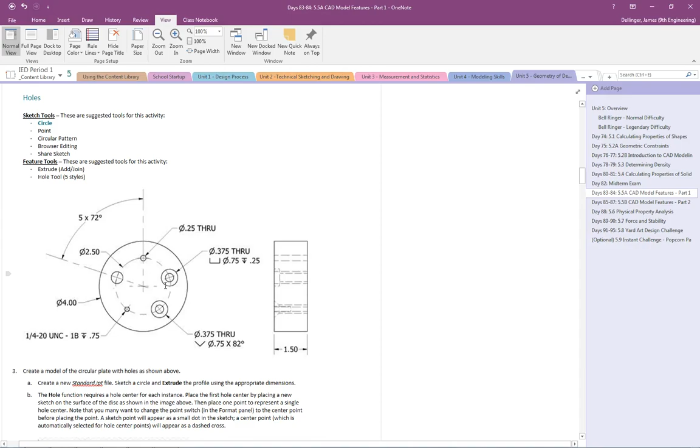Since this is the first time people are using pattern, the holes thing, while it's quite simple, can be a little tricky when it comes to the pattern. Also, you've not used the hole command very much, and so that can confuse you as well. The hole command is different from everything that we've really done up until now, because up until now we've made a sketch and then we've done something with the sketch, like extrude it.

Right now, holes is a little bit different. Some of you may have played with this. Holes is different because we make a sketch, but the hole command works on points. So you place a point and then the hole command works from that point. So what we need to do is first make a

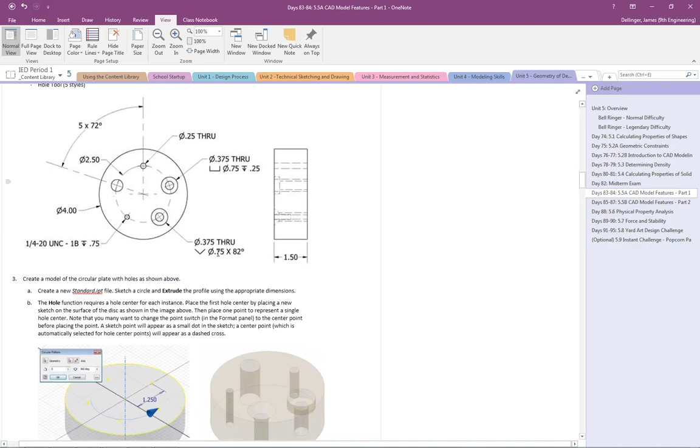slug, a round disc, and then we're going to poke some holes into it. It's going to be 4 inches in diameter and 1.5 inches thick. So we go over here to Inventor, and then we will start the sketch.

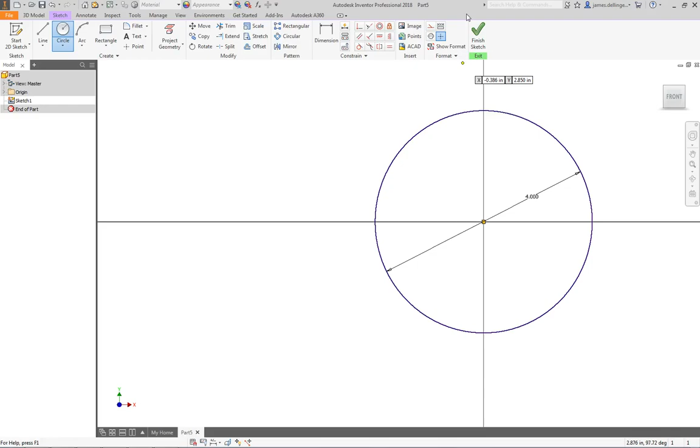Click there, and let's go ahead and make our circle. Drop it on the origin, say 4, enter. Finish the sketch. From there, go extrude. I want to extrude 1.5, and so now I've got my disc.

I can go in, I can go ahead and create sketch. And from there, I'm going to make another circle, because if we look here, we have this, all the 5 circles are equidistant, and they are at 2.5 inches in diameter to their center point. So 5 by 72 degrees, 2.5.

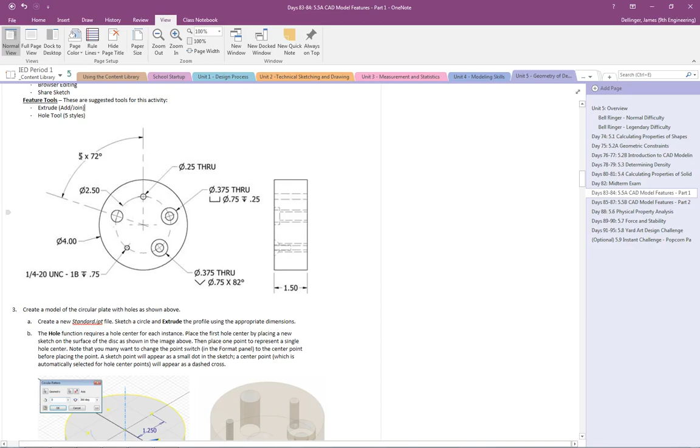Do not draw this and do the hole command, or try to do this without using the pattern. The whole point of this is the pattern. So we're going to make another circle. We'll drop that in, 2.5. Let's go ahead and click it, right click, construction.

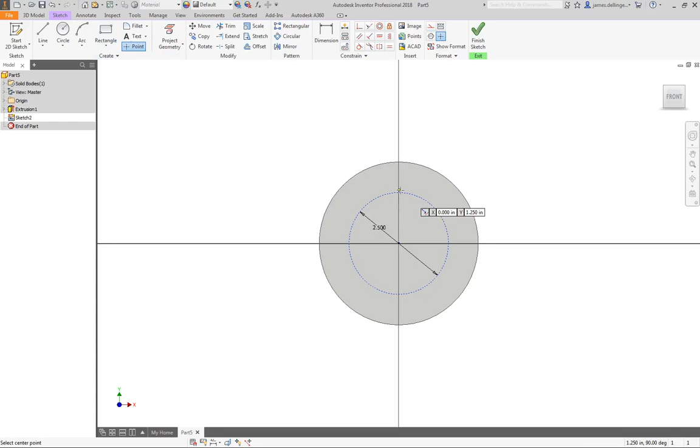We're going to go point, and we'll drop our point there. So we have a point. It's a little hard to see because it's yellow, but there's a point there.

Now all I have to do is the pattern. It's right here in the pattern section. Go circular pattern. I'm going to pick my geometry first. It says select geometry to pattern. Click my point. I'm going to click over here to the arrow on my axis, and it says define axis of revolution. That's my center point of my circle, or my origin.

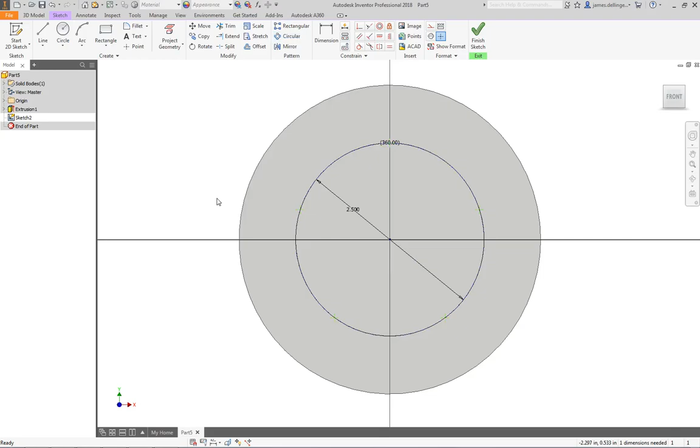And you'll notice I'll have 6 points here. 1, 2, 3, 4, 5, 6. I really want 5. So now I have 1, 2, 3, 4, 5. Hit OK, and now I have my 5 points. And I can finish my sketch.

Now all I have to do is go to my sketch, and if I select it and say hole, it's going to automatically try to punch 5 holes in there because I have 5 points, and it thinks that's exactly what I want. And those holes are 1/4 inch in diameter, and it goes all the way through, and you can see that they go all the way through.

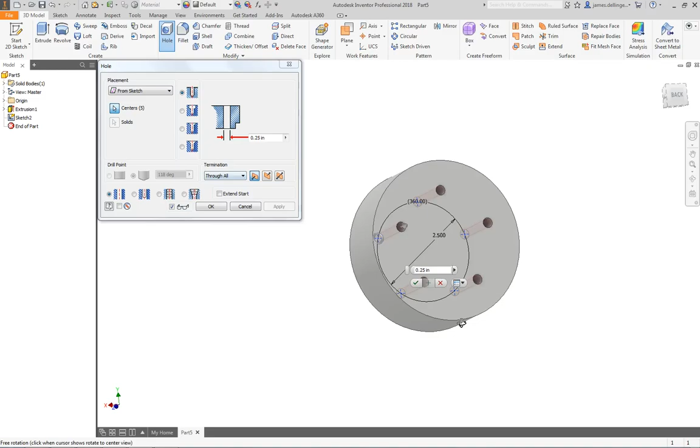I don't want but one hole to be that way, so I'm going to hold down the shift key and click the point. As I click those points, if you don't click the point, you can get yourself in trouble. Just exit out and then try it again. But you can do that. And you got the one left, say okay.

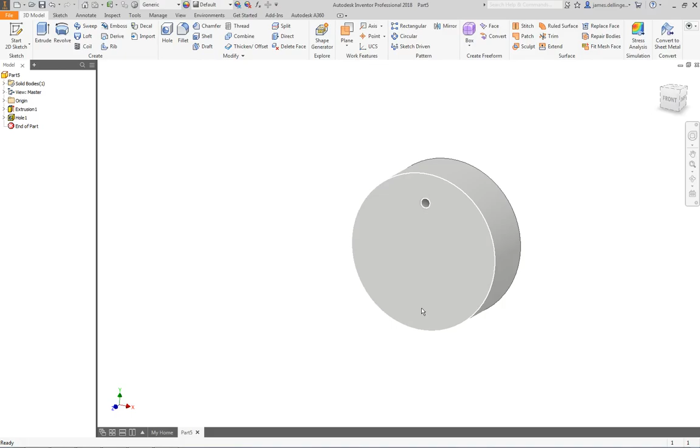And then notice, oh wait, I have 4 more points that I need and they're all gone. So what you need to do is come over here to hole, and we need to share the sketch. So open that up, click that little arrow, right click, and say share the sketch.

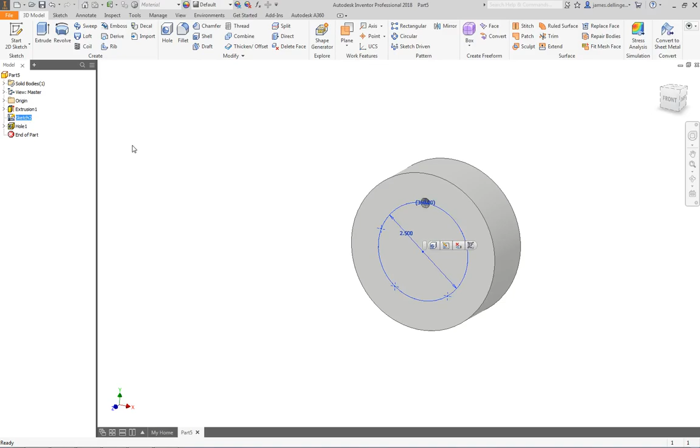That will let me see it again, so then I can use it in other hole features. Now I can do 2 things. I can click on sketch, I can hit hole, and you'll notice that it populates all 4. And then I can hold down the shift key again and turn them all off, and then do that one next.

Okay, let's go ahead and do that. We'll do the counterbore, hit OK. It's not the right size. You go and set it to the right size based upon the

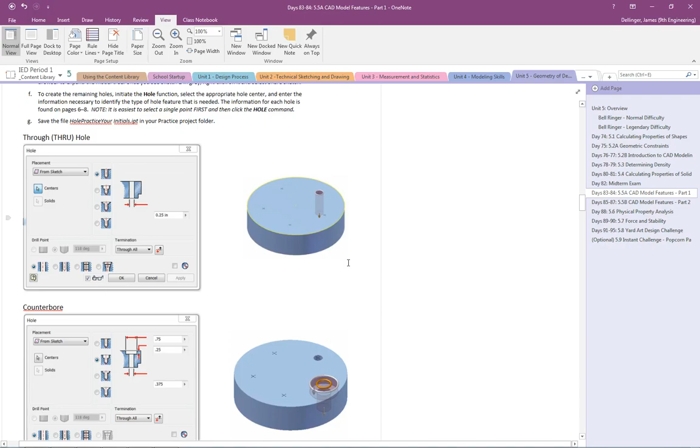directions in here. So you're going to have to roll down here, and then you will see that for each of these, here's what you should set the settings to. Here's the settings for this one, so forth and so on. All right, I'm just going to go to the default ones because why not? It's a little bit quicker for you guys.

The other thing we can do is I can go back to that sketch, and I can click, you know what, I just want just this point. I'm going to say a hole, so I selected the point, and then we'll do the countersink and say OK. All right, again, not the right size. I'm just doing this for time's sake.

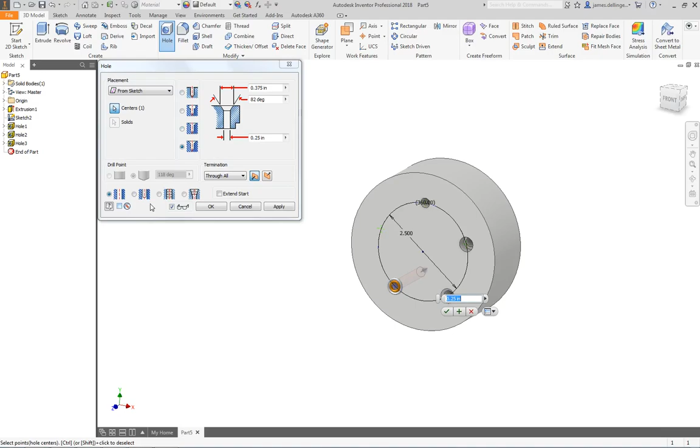Click on my sketch, select my point, pick my hole, and this one is, I think, a tapped hole. So let's go here and then make it tapped, and there we go. And you'll notice when you do that, it's kind of cool. It actually puts in like fake threads for you because a tapped hole has threads.

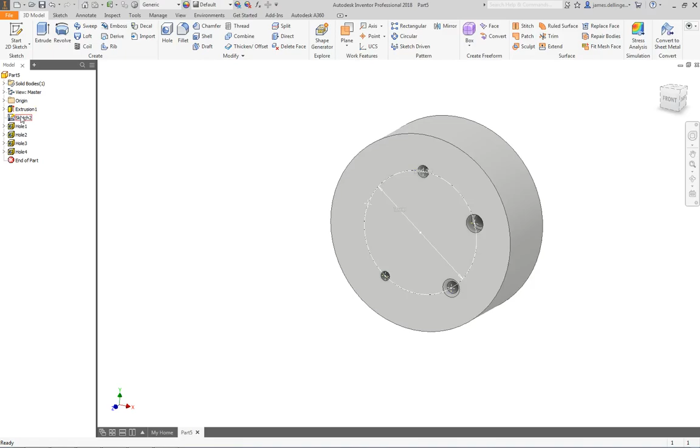And then the last one we're going to do is clearance hole. And so that's when you have a bolt and you want the bolt to pass freely through the hole and not get hung up in it, or not have threads and not grip the sides of the hole.

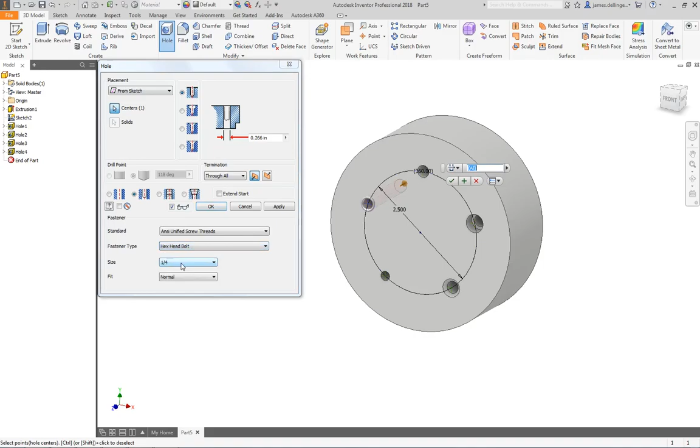So the clearance hole, so we can go up here and then we can say we want this to be clearance, and then you have to say what kind of screw are you going through. And so we're going to say ANSI unified screw threads. We're going to say a hex head bolt, and I forget what it's supposed to be, 3/8 or something like that. And then the fit is normal. You can go very, very close, and that means tight, or very, very loose. We'll go normal, and we'll hit OK, and then it gets our through hole.

Now again, these sizes aren't right. I didn't make them match because I want to keep this video reasonably short, but that's how you do it.